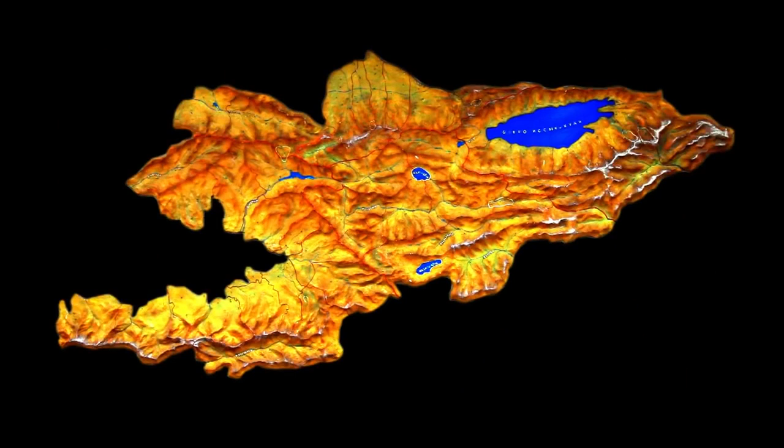In the north, Kyrgyzstan borders Kazakhstan; in the west and northwest, Uzbekistan; in the southwest, Tajikistan; and in the south and southeast, China. 94% of the country is mountainous. Some of the highest mountains in the world, Peak Pobeda, Khan Tengri, and Lenin Peak, are in Kyrgyzstan.

It stocks pure water, some of the finest in the world. Especially prides of Kyrgyzstan are its high mountain lakes, Sarychelek, Chatyrkul, and Issyk-Kul, known to the world as the pearl of Kyrgyzstan.

Kyrgyzstan is a democratic country which declared independence in 1991. The capital is Bishkek. The population of Kyrgyzstan is over 5 million people. It is a multinational state.

Kyrgyzstan is a country with unique environmental conditions and monuments of ancient culture, creating outstanding opportunities for tourism development. The world's tourism is attracted by the pride of Kyrgyzstan.

My small native land is Batken. Batken Oblast is located in the southwestern part of the republic and was founded in October 1999 after it separated from Osh province. The Batken region itself is known in Kyrgyzstan for its sweet apricots and a rare flower called aygul.

Batken State University was established in 2000. It is one of the leading universities in the Batken region of Kyrgyzstan. Its structure includes 4 institutes and 2 colleges, with 9 faculties and 3 secondary special educational departments.

Batken State University implements a multi-level system of education with the release of bachelor's degrees in 22 specialties of higher education, as well as preparing a program of specialized secondary education in 18 specialties. About 8,000 students study in pedagogical, technical, and economic directions.

One of the main tasks of Batken State University is the development of science through research and innovation. The research work of scientists is associated with the education process, theory, and practice, as well as the profession acquired by the students. Students successfully participate in various forms of research.

For achievements in study and research work, many students were awarded presidential scholarships and a variety of other scholarships. Today, Batken State University has graduated more than 20,000 professionals who work successfully not only in Kyrgyzstan but also in many countries near and far abroad.

In the country, they occupy positions as heads of many large organizations, companies, and enterprises.

The university successfully operates 2 sports complexes. Among the students and faculty members are champions and winners of international, Central Asian, and national competitions.

The young university is developing dynamically year after year. It has a modern material, technical, and information base, and a cohesive, hardworking faculty and university management.

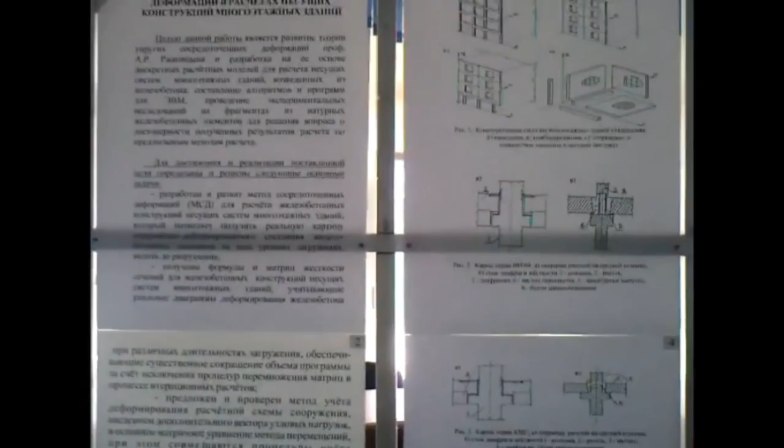Dear participants of the forum, this is a presentation on the theory of concentrated deformations in the calculations of carrying constructions in multi-storied buildings. Future projections show that the concentration of population around big cities is a logical, objective, and global process related to population growth and the development of productive forces.

Of course, in terms of the natural limitation of land and its increasing value, cities cannot infinitely spread outwards. They grow and will continue to grow by increasing the number of stories of residential, civil, and public buildings. With the increasing number of stories, the buildings become more complex and critical structures.

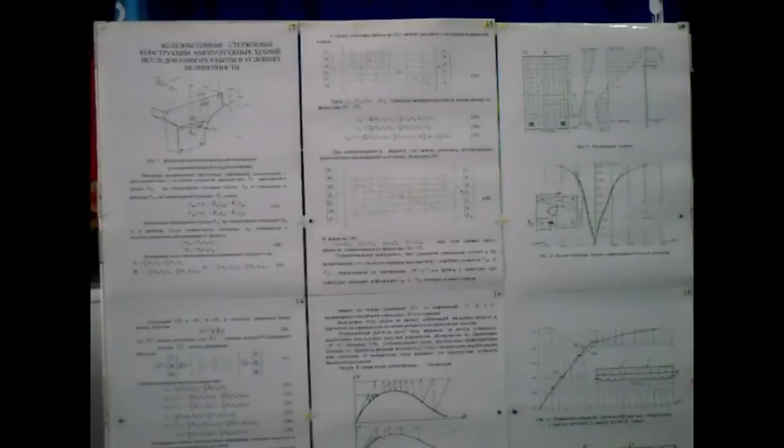Their responsibility is the fact that in administrative or residential high-rise buildings housing thousands of people, life and well-being are directly dependent on the knowledge and skills of designers and builders engaged in these facilities. Reliable operation of the individual elements and their combination must be provided based on the total load and impact at the stages of manufacturing, installation and operation.

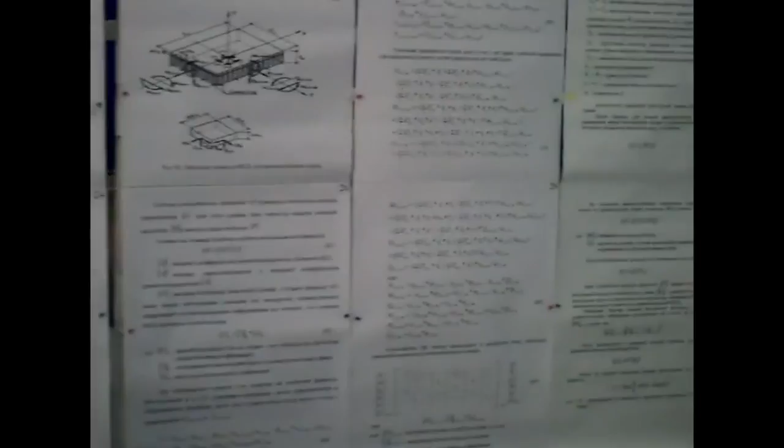In this calculation, the most important stage is the construction of computational models for the individual components of building systems in general. Computational models must meet two dialectically contradictory requirements. On the one hand, the calculation model should more adequately reflect the characteristics of the simulated elements of the support system.

On the other hand, it should be simple and easy to implement using computational tools. To address this issue, we have developed the method of focused deformation, proposed by Professor Alexey Rufovich Rzhanitsyn and developed by Associate Professor Dodonov, applied to reinforced concrete structures, allowing determination of strength and displacement for various stages of the stress-strain state from the time of loading to destruction, taking into account long-term exposure.

The essence of the method of focused deformation is that the source rod is divided into elements by planes, between which the sections adjoin the strain-focusing elements. The main advantage of the method of concentrated deformation is stiffness matrix generation for sections of elements. For rod systems, the elements of the stiffness matrix of the cross sections are the beam stiffness characteristics.

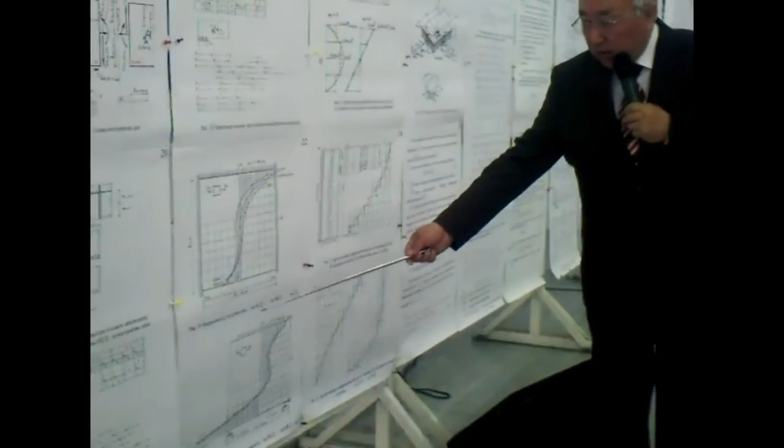It is established that flat stressed reinforced concrete elements of multi-story building systems, taking into account the non-linear operation of the concrete and reinforcement in structures, as well as connections between precast elements, can be simply and reliably calculated by the method of concentrated deformations.

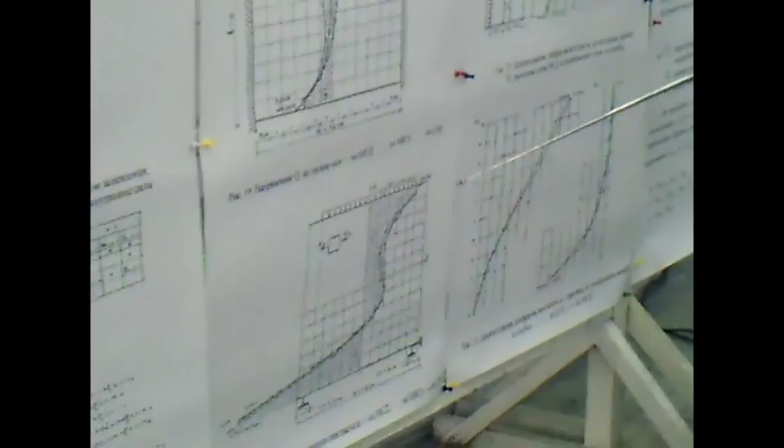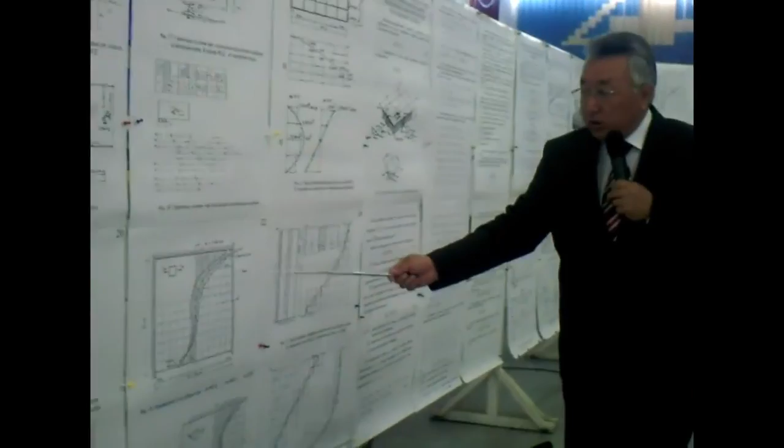The developed methodology and calculation algorithm allows use of real material deformation diagrams and takes into account the non-linearity and uneven development of normal and shear stresses at the height of sectional elements, due to the conditions of supporting them in cramped conditions and the presence of the trough effect.

Cost-effectiveness outcomes were investigated and confirmed, showing that implementation of these regulations helps reduce the cost and time to design and build high-rise buildings by 30%.